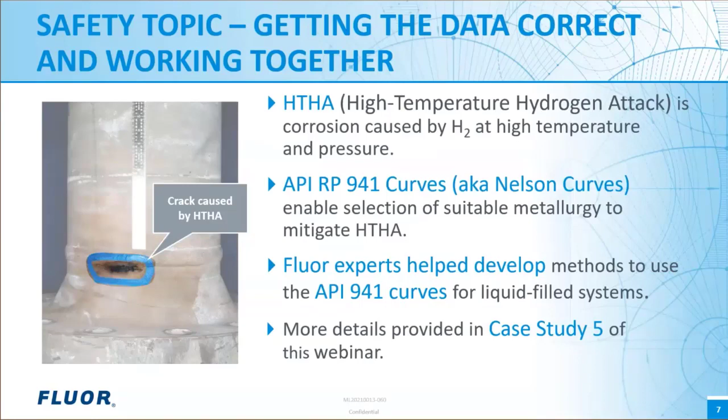Many processing plants rely on simulation models to provide the thermodynamic properties for design, and thus the use of the correct starting blocks is critical. The selection of a suitable thermodynamic property model to predict the vapor-liquid equilibrium for system components is important and can affect simulation results considerably. Without attention to detail, chemical engineers can find themselves relying on powerful process simulation programs without having the proper background knowledge in applied phase equilibrium thermodynamics. Sometimes a poor choice in the selection of a property model is made, or even sometimes no choice is made at all and the default is used.

Paul and I will talk about the benefits of special attention to property methods. Manipulation of these models in conjunction with other expert knowledge from the design team can improve safety and system design, and cut costs for the client.

We'll introduce what property methods are and why they're important, talk about different property methods and what they're used for, and remind the community about the AIChE DIPPR database. We'll also talk about Fluor's secured databases, developed to better reflect actual operating data, and look at case studies where our specialists have improved design in terms of product purity, safety, and operability.

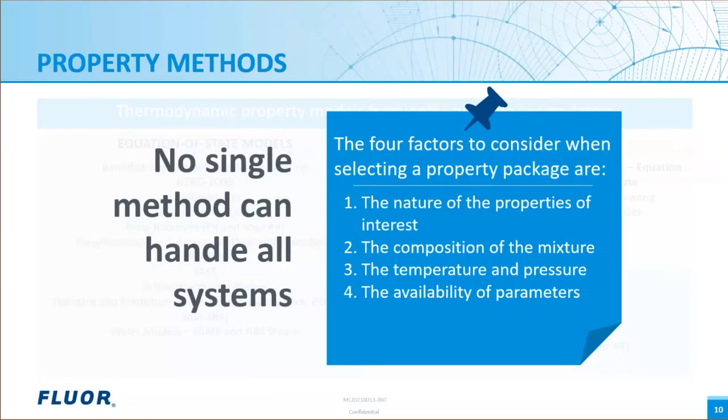Process simulators have a large number of methods available which are sufficient for most applications.

Thermodynamic properties are defined as characteristic features of a system capable of specifying the system's state. The items in the table frame the properties of a component, and those properties are not dependent on the physical quantity of the substance. Each property method has a different approach to thermodynamics, for example representation of the K value. Specific property methods have been developed to better model specific component mixtures.

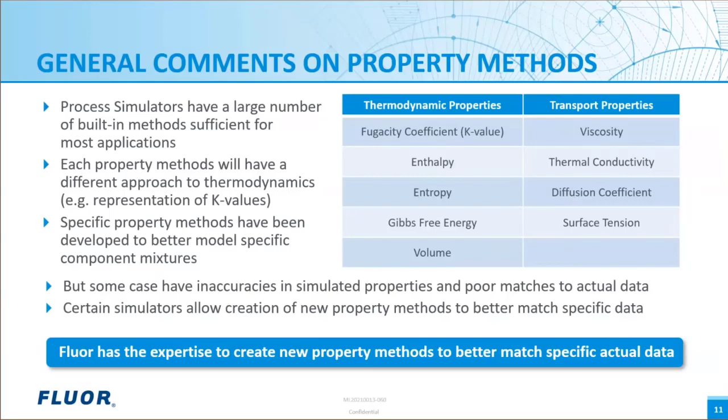All of this is very important. There are, however, regular inaccuracies in simulated properties, which sometimes have poor matches to actual data. What do we do then? We rely on other methods to approximate systems. We're going to concentrate on this today because Fluor has the expertise to create new property methods to better match specific actual data.

How does Fluor create new property methods to improve the match to actual data? One way is by modifying existing property methods. Using secured property databases helps us do this.

Secured property databases are a way of enabling improvement to existing simulators' property packages, based on operating data or literature data analysis. The data is available for specific or all members of the owner's organization for use in creating simulations. The database is not available to people outside the owner's organization, but making manipulations to the property methods in specific instances where there is a poor representation to actual data enables us to have improved process design.

Fluor has a number of secured property databases to improve commercial simulator models. They benefit clients by ensuring improved system modeling, ensuring that their plants are designed fit for purpose.

Fluor secure databases include the Fluor Solvent process, used for gas purification for the bulk removal of CO2; the Fluor EconoSolv process, based on dimethyl ethers of polyethylene glycol for selective removal of H2S and bulk removal of CO2; the C3 splitter for improved modeling of the separation of propane and propylene; Methanol, using a methanol-based solvent for removal of H2S and CO2; and Ammonia Water, where the properties of aqueous ammonia are very important to many process technologies.

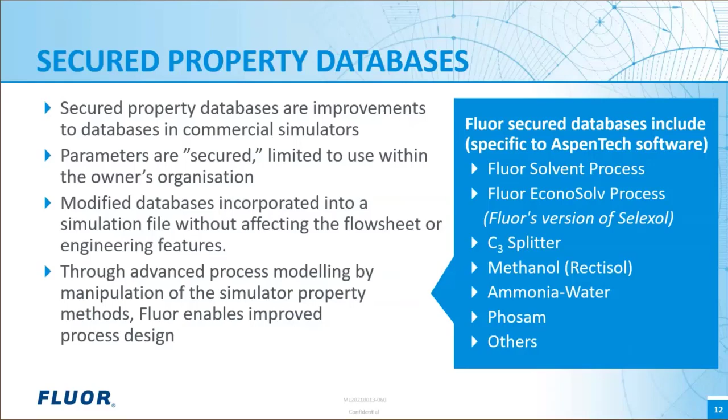Phosam, which uses phosphoric acid to separate ammonia from acid gases such as H2S and CO2, has enabled the development of a Fluor patent for removal of ammonia from Claus feed gas, and there are lots of other applications as well.

Another tool which chemical engineers at Fluor have available is from the American Institute of Chemical Engineers: DIPPR, the Design Institute for Physical Properties, a technical society of the AIChE. DIPPR's Project 801 database is recognized as the world's premier source of critically evaluated thermophysical properties.

It is an extensive database of rigorously evaluated pure component data. Due to the cross-spectrum industry review and the data research and analysis techniques, DIPPR is considered the gold standard.

It uses 34 constant properties and 15 temperature-dependent properties for compounds of interest. There are more than 2,300 compounds developed in the sponsor database.

People who use DIPPR are often companies involved in manipulating chemicals in new products and manufacturing processes, and the database is based on industrially important chemical compounds.

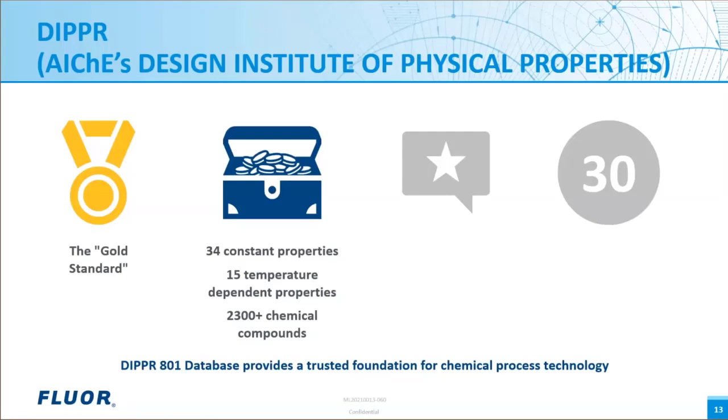Each year, members are invited to vote for the addition of new compounds or the review of existing compounds to ensure the database is kept current by incorporating feedback.

Correlations are developed by principal investigators and reviewed by industry experts. Fluor has been a member for more than 30 years, and Paul and others have chaired the membership committee during this period.

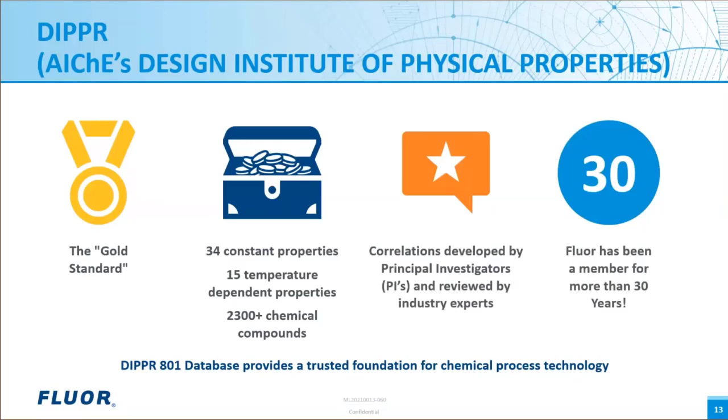The following are some quotes on how industry experts and our Fluor colleagues use DIPPR. With modern simulators, there's a tendency for blind automation, that is, not having the ability to see whether data and output are good or bad.

DIPPR provides background data for checks and verification. It also provides additional data for some items which simulators rarely provide, such as auto-ignition temperatures and flashpoints. It's useful for streams where it's not possible to create an entire simulation, but details are needed for relief calculations.

For instance, triglycerides and fatty acids, which are important in the process industry with the increasing prevalence of biofuels. That's as much as we need to say—it's an important tool which Fluor has been working with for many years.

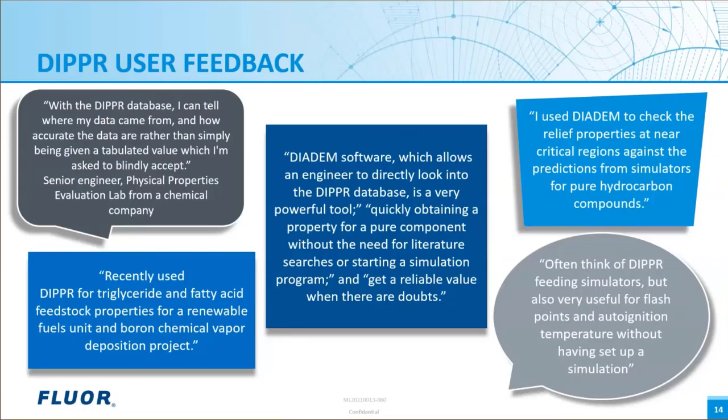We're now going to talk through a selection of case studies which show how, by our deep understanding of chemical thermodynamics, our chemical engineers work with other company experts to provide safe and operable designs.

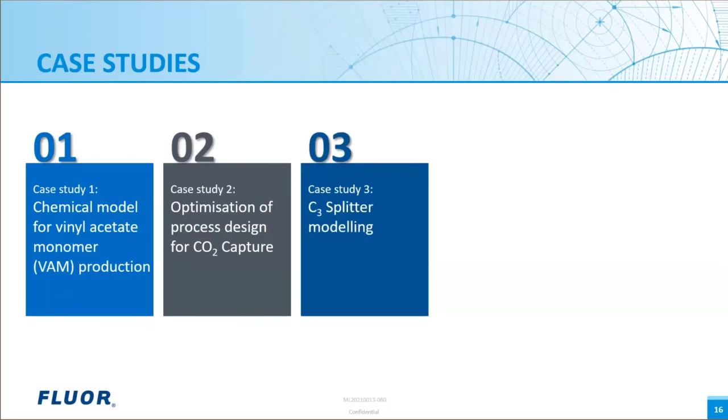We have 5 case studies which will address, firstly, modification to property methods to create a chemical model for vinyl acetate monomer production. Secondly, some of the ways we have improved our CO2 capture modelling. Thirdly, C3 splitter modelling in conjunction with our distillation expert Henry Kister.

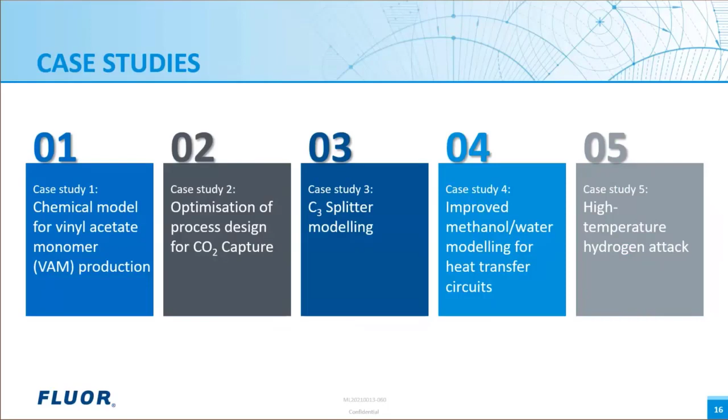Fourth, the care required in reviewing thermodynamic data and transport properties using methanol-water heat transfer fluid modelling as an example. And more detail on high temperature hydrogen attack, as touched on in the safety moment, where company senior fellows Paul Mathias, Gary Jacobs and Cathy Shargay provided their expertise.

Case study 1 is regarding the chemical model for vinyl acetate monomer production. We were provided with a heat and material balance from a licensed technology. Fluor needed to develop a simulation to reflect this. While preparing the simulation, it became apparent that the property method did not reflect the licensed technology or operating data.

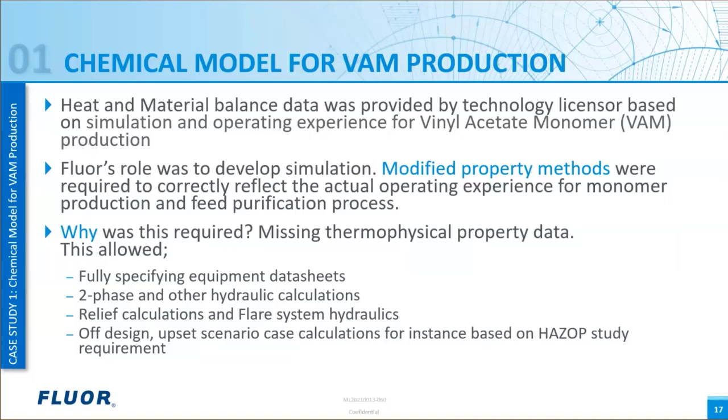Fluor needed to better model the data and provide missing thermophysical property data. This allowed fully specifying equipment data sheets, two-phase and other hydraulic calculations, relief calculations and flare system hydraulics, and off-design upset scenario calculations, for instance based on HAZOP study requirements.

So what did Fluor need to do? Thermophysical properties were required to simulate the VAM monomer production reaction. Areas which required particular attention were high pressure vapor phase reaction, CO2 removal, product purification and byproduct removal, and heavy ends removal.

After review of the data and the literature, 2 property models were modified for better representation of the data. These were molecular, which was used for most of the process, and electrolytic systems.

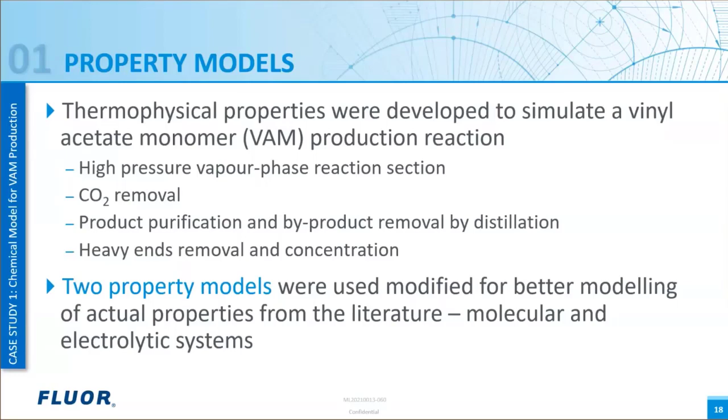This is a summary of the ASPEN Plus model modifications which were carried out. VLLE data was regressed using the ASPEN Plus data regression system, using various reliable data sources.

For the first item on the table, about the adapted property methods: this used standard NRTL to describe the non-ideality in the liquid phase, with Redlich-Kwong in the vapor phase. In this instance, the Redlich-Kwong method was modified to treat the acetic acid as a dimerizing component.

Dimerization is two molecules of similar chemical composition coming together to form a single compound known as a dimer. In this instance, due to the carboxylic group and the position of the hydrogen bonds, gaseous acetic acid can form cyclic dimers with strong hydrogen bonds. This needs to be taken into account in design, but is not otherwise modelled by simulation packages.

The second property method on the table is a subset of the first using the Margules perturbation method and could be used for sensitivity checks. The third is the electrolytic NRTL in the liquid phase, which was applied to CO2 removal, again with variations of Redlich-Kwong in the vapor phase. This was to model hot carbonate for CO2 removal.

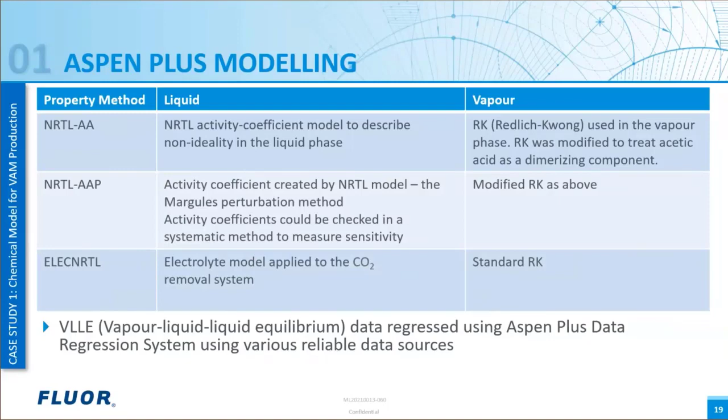The results of the simulations were compared to the literature for completeness. Here's an example of the phase behaviour for two ternary systems: vinyl acetate, acetic acid, and water. Points on the graph are actual data and the lines are calculated by the model. I think you'll agree that the calculated data matches the actual data pretty well.

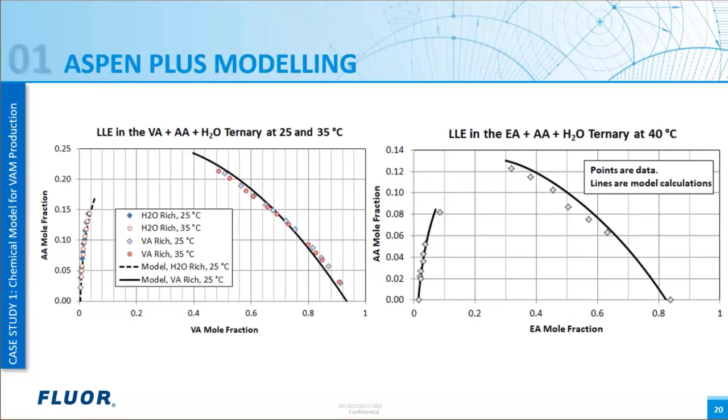So why was the property method manipulation so important? We described previously what the expected outcomes for design were, but in particular it should be noted that the data for the flash gas compressor from the licensor was only preliminary data. Design was firmed up using the property method to understand the extent of dissolved gas in the VAM streams, which in turn was integral to the machine package design.

Also, in the long term, the client wished to develop a training simulation, meaning a full plant simulation would be invaluable. Now going to hand over to Paul, who's going to talk about case study 2, which is the optimization of process design for CO2 capture.

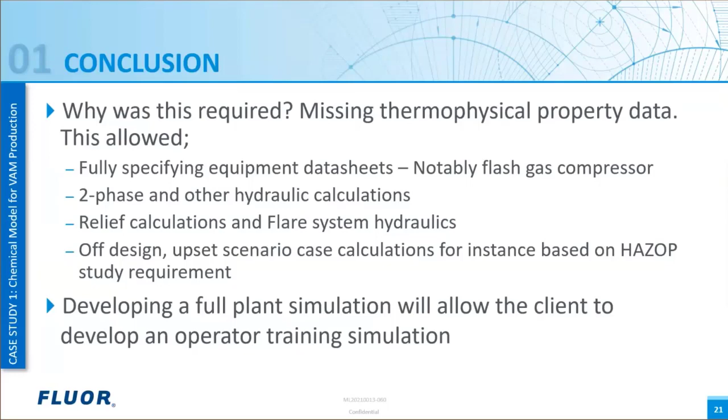Thanks very much, Samantha. I'll now, as Samantha said, move on to talk about CO2 capture technology. The transition to net zero will certainly not happen overnight, and sequestration and capture of CO2 are expected to provide a useful technology to mitigate climate change in the medium term.

Fluor has been developing and offering CO2 capture technology for more than two decades. Process modeling is particularly critical for CO2 capture processes due to the large energy requirements and capital costs. Just to give you an example, post-combustion CO2 capture could reduce the thermal efficiency of a power plant by something like 20%. By contrast, CO2 removal from natural gas, the reduction in thermal efficiency is an order of magnitude less, or about 2%.

Hence, accurate and reliable modeling is of vital importance to minimize TIC, or total installed costs, and also operating costs.

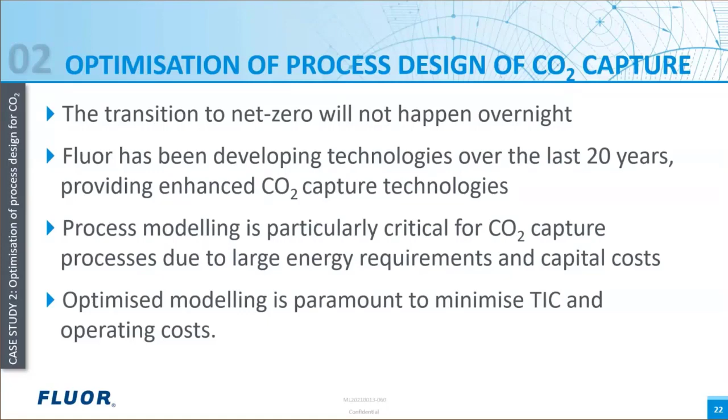Samantha mentioned the value of secured property databases for process technology. Fluor has developed these databases for its technology known as Econamine FG+. This technology has been validated for several CO2 sources, including those from power plants, cement production, and SMR, or steam methane reforming. Significant effort has been devoted to ensuring a technological advantage for Fluor's technology, both within the company and also in collaboration with partners.

As an example of working with partners, Fluor is collaborating with PNNL, or Pacific Northwest National Lab in Richland, Washington, to develop a slate of water-lean solvents. It's another example of the advantage of bringing together a diversity of skills to facilitate technology development. Fluor, as you may know, has expertise in process modeling, process design, plant construction, and operation and cost estimation, while PNNL's expertise includes areas like molecular modeling, compound synthesis, a variety of sophisticated analytical techniques, and generally chemical R&D.

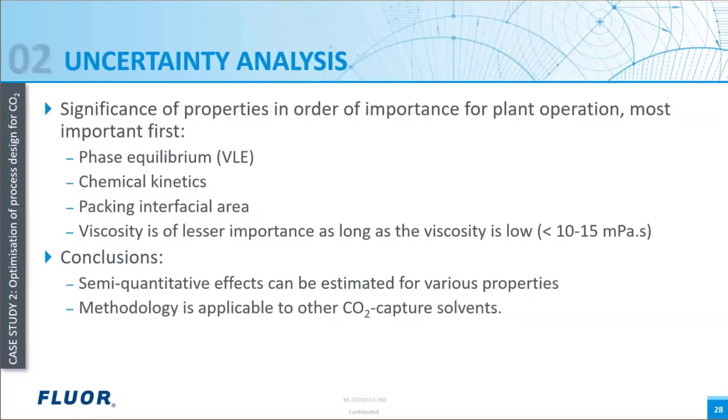Thank you very much, Paul. Case study 3 concerns improved modelling of C3 splitters. C3 splitters separate propane and propylene by distillation. The separation is very difficult to simulate accurately, as the propylene-propane relative volatility is close to 1, typically 1.05 or 1.1.

Small errors in the relative volatility cause large uncertainties in column design, for example, for the reflux ratio and reboiler duty.

A property database of the best available data was developed by Fluor in collaboration with the recognized industry distillation expert and Fluor Senior Fellow, Henry Kister. Paul will be blushing at the moment, but as Fluor Senior Fellow, his and Henry's exceptional level of expertise were used for the creation and validation of this database and property model.

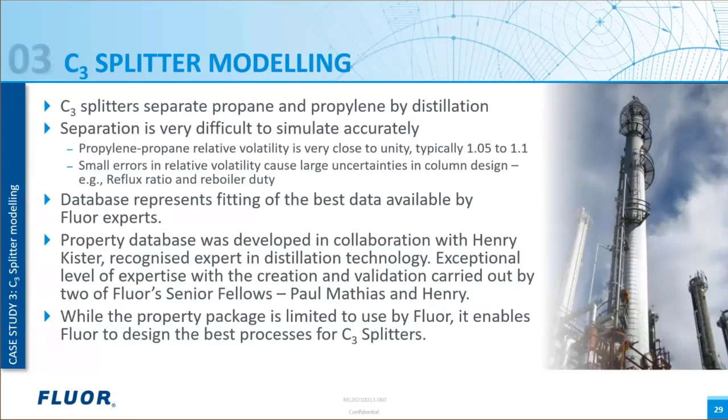This is one of the secured property databases I mentioned earlier, which you will remember is limited to use by Fluor, and it enables the best design for C3 splitting processes.

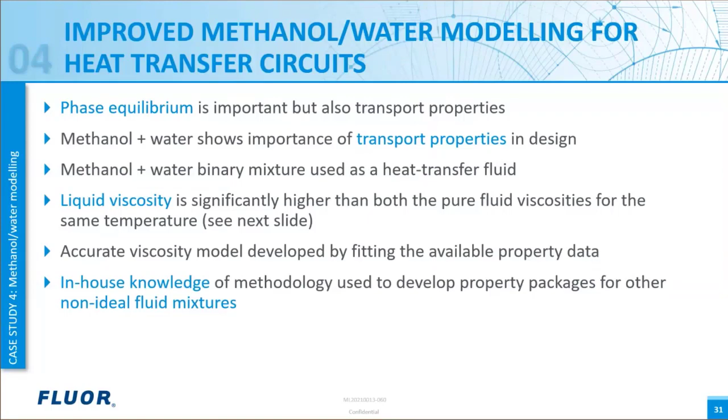Methanol plus water is a binary mixture used in heat transfer fluids. The liquid viscosity of the mixture can be significantly higher than that of the pure fluid viscosities depending on operating conditions. In this instance, an accurate fluid viscosity model was developed by fitting the available property data. This in-house knowledge can be applied to develop property methods for other non-ideal fluid mixtures.

I doubt any commercial simulator would give you the degree of accuracy that this independent modelling has provided. As I said previously, this is an example of the benefits of being able to model a system correctly when there are unexpected values for transport properties. The method employed can be used for other examples.

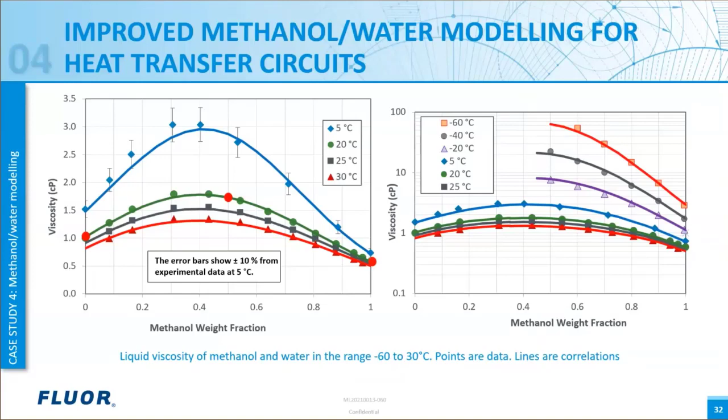Thanks very much, Samantha. As I stated in the safety topic, HTHA, or high temperature hydrogen attack, is a dangerous condition that can occur in process equipment constructed of steel and exposed to hydrogen at elevated temperatures and high hydrogen partial pressures. The API curves provide an authoritative guide for safe material choice to mitigate the occurrence of HTHA by relating material selection to temperature and hydrogen partial pressures.

These curves use the result of experimental tests and actual data acquired from operating plants to continuously update practical operating limits for carbon and alloy steels in hydrogen service.

As I mentioned earlier, HTHA can and does occur in liquid filled systems, and hence the use of the API curves requires estimation of the hydrogen partial pressure as a function of temperature, pressure, and liquid composition. However, there is less experience in applying the API 941 curves to liquid filled systems.

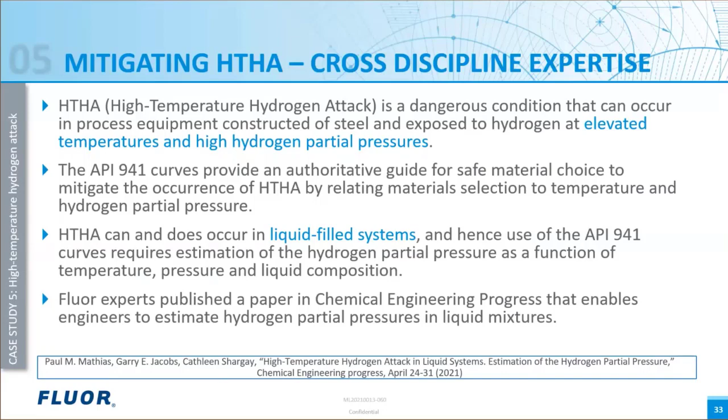My colleagues Garry Jacobs, Cathleen Shargay, and I published a paper this year in Chemical Engineering Progress that helps materials science and process engineers estimate hydrogen partial pressure in liquid mixtures so that the API 941 curves can be applied. We will next provide the takeaway messages and results from this paper, but we urge the readers to actually read the paper for the details.

I should inform you that material experts typically apply a safety margin of 50 degrees F or 28 Celsius to account for uncertainties, for example in temperature or hydrogen partial pressure. As an example, I'm going to show you some specific results for the steel grade required at a hydrogen partial pressure of 500 psi or 3.4 megapascals.

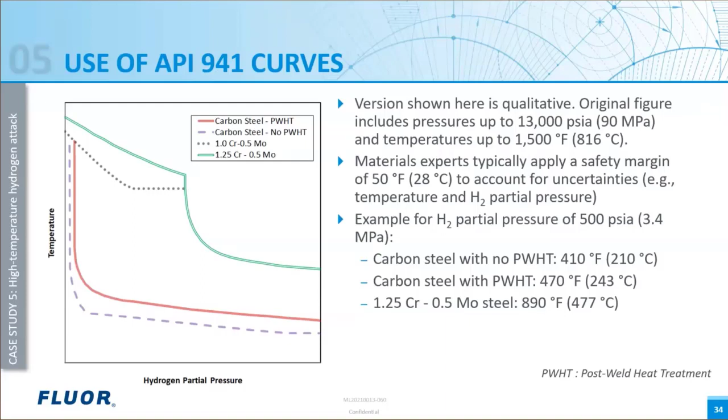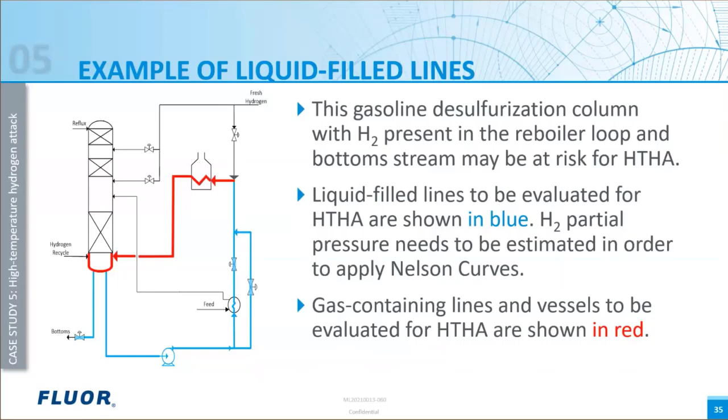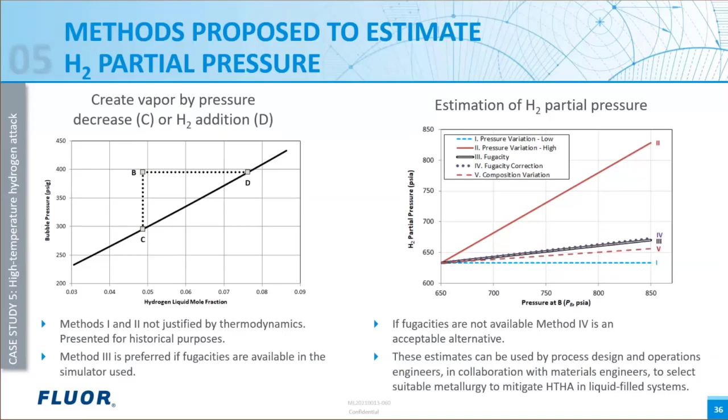This concludes the presentation of our case studies, and I will now move forward to a summary of our webinar. So let's move forward to the summary.

So how does Fluor actually acquire useful operating data? As Samantha mentioned in case study 1, vinyl acetate monomer, we checked the model against the design provided by the vendor. In some cases, we modified the model. In other cases, we challenged the design. This is an iterative process since we constantly go back to the data and our experience.

In case study 2, which is CO2 capture, we demonstrated the use of lab and pilot plant data to improve our models. And in case study 3, which is Fluor's C3 splitter model, I worked with distillation expert Henry Kister to use data from operating columns to help fine-tune the property models.

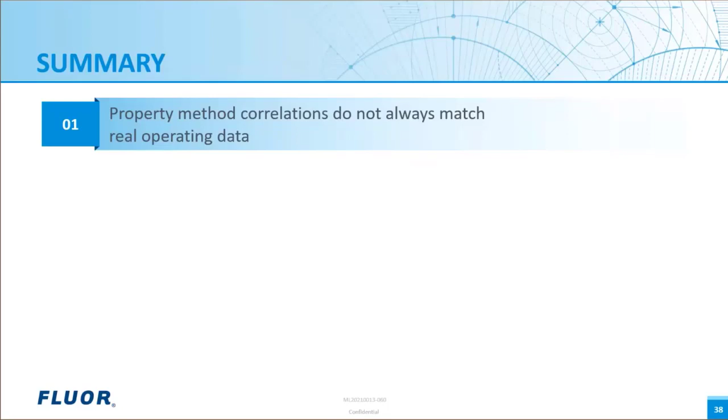Let's move on next to talk about this whole question of intuition and understanding. Having a human analyze, question, and interpret results is absolutely critical. Experienced process engineers can tell when the results in the model don't seem quite right or quite normal. The discussion on DIPPR shared this observation of an expert who said, with the DIPPR database, I can tell where my data is coming from and how accurate the data are, rather than being simply given tabulated numbers which I'm asked to blindly accept.

With the increase in automation, it's doubly important that engineers obtain a good feel for properties. Case study 4, the viscosity of methanol water, presented by Samantha, really highlighted the importance of recognizing that some properties may be different, may be unexpected, but they're also correct because they come from empirical data which has been validated.

We also need to improve our intuition. The discussions on property uncertainty analysis highlighted its use in developing design margins, but also its use in developing a feel for the effects of various uncertainties, as Samantha pointed out when we talked about uncertainties for the C3 splitter.

We at Fluor work very hard to make the best property models available to our engineers. In case study 1, we made sure the property model modeled the vapor phase dimerization of acetic acid. And the discussion on secure property databases highlighted the value of providing our engineers with the best and most current property methods. Of course, this is an ongoing effort.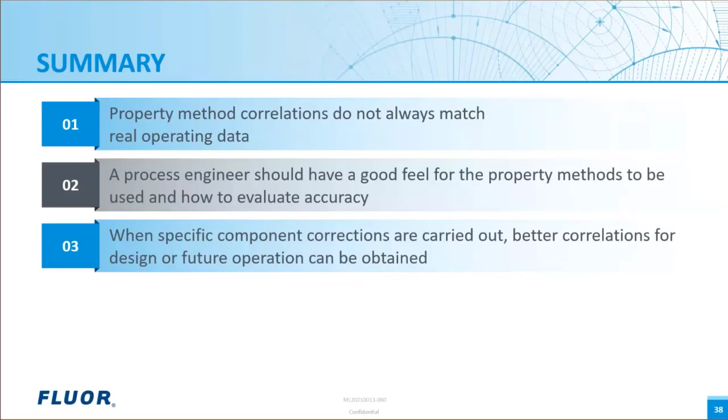Finally, in conclusion, I want to tell you that Fluor has strong expertise in applied thermodynamics and indeed other process technologies, and this ultimately ensures safe and operable designs. Thank you very much for your attention. We now look forward to receiving your comments and your questions. Thank you again.

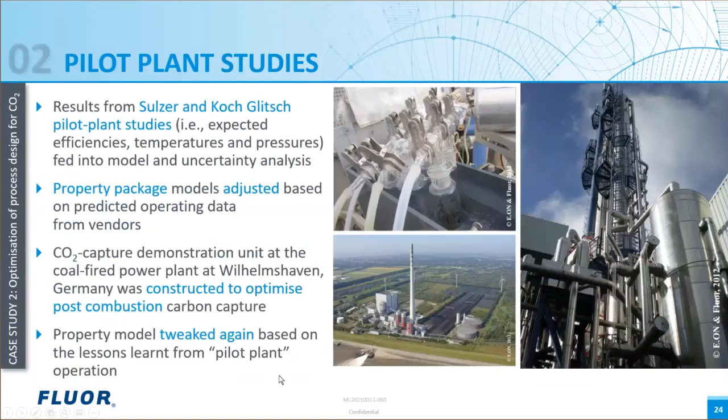Some of our technology hasn't really been described completely because it's proprietary. But I would refer you to the work that we did in collaboration with PNNL and other groups such as RTI on the EEMPA solvent, because that has actually been published extensively and in fact has been tested extensively. As I mentioned, there are lab tests that have been done. There was work done at PNNL labs. There's also work done at RTI in North Carolina. And as I mentioned, this solvent will soon be tested. This is an ongoing effort at the National Carbon Capture Center in Wilsonville, Alabama.

So I believe it's absolutely necessary to use a rate-based model for chemical absorption. And I think that I would not get any disagreement from experts in the field.

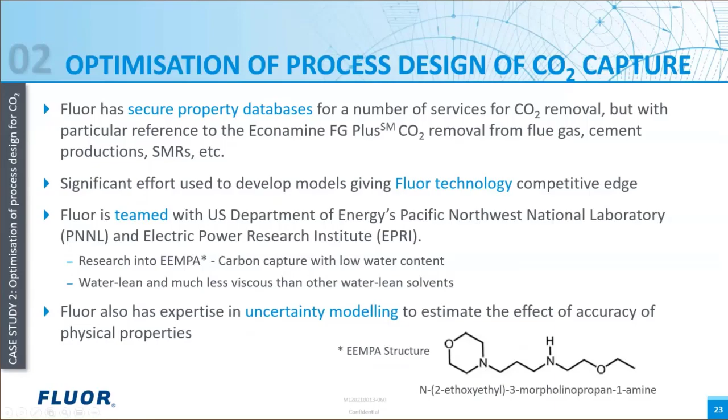And just as an extension to that question, where does diffusivity fall in the order of important properties as shown on slide 27? Well, it's somewhere in there. I think it's less important because we typically get a very high enhancement from the chemical kinetics, and oftentimes it's sort of mixed up in there, which is why I think even after we put in the best physics that we can, we've got to recognize that some of these models don't capture everything, and that's why we do pilot plant studies to sort of do the final fine-tuning.

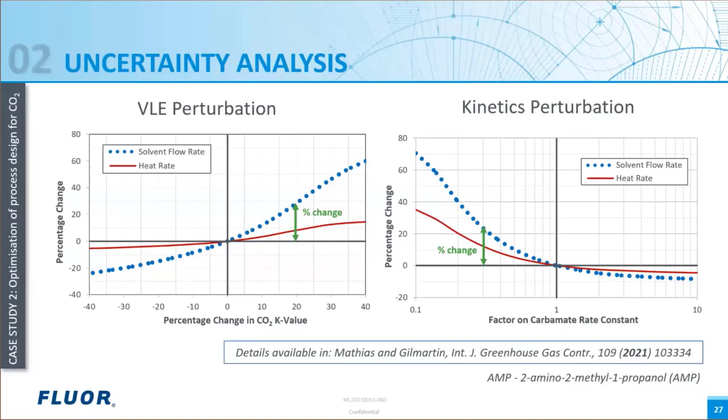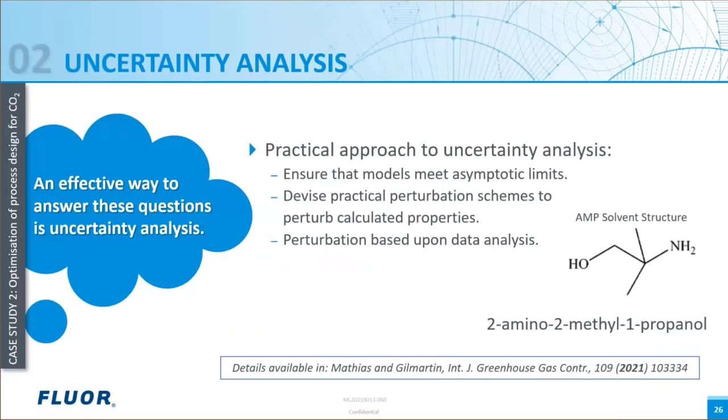I sort of mentioned this, but in a lot of these models there's something called the interfacial area factor that we may adjust, and these are adjusted based upon either lab data or pilot plant data. I wish our models were better. I think our models are pretty good and they're improving all the time, but we do have to put in empirical factors, and that's really why the experimental measurements are so critically important in order to validate the technology and make sure that we can actually scale up equipment.

I think we as a sort of a global community are getting better at this, and we certainly can get better, but ultimately it's some sort of a combination between good, practical, rigorous process modeling and the experimental data. There's constant complementarity, I think, between the two.

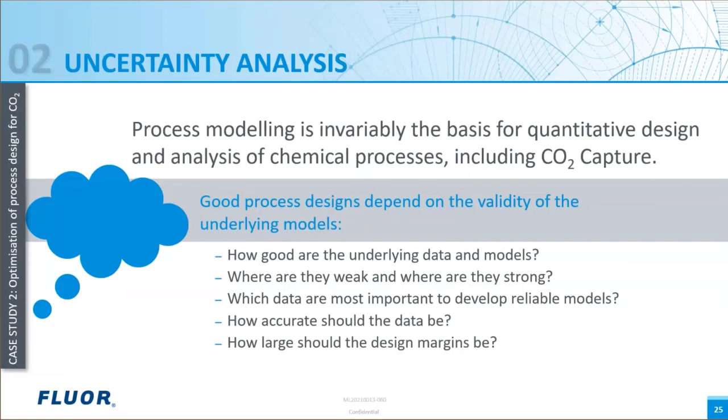All right, thank you for that. Next question is for Samantha. Do you think design margins, tray efficiencies will come down as we improve understanding of properties and uncertainties in simulations, or will owners want to stick with established norms?

Well, I could think of an example where on the C3 splitter, where we looked more deeply into the licensor design. It was an established licensor who'd done a lot of C3 splitter work before, but using the calculations and the methodology that we previously described, we came up with about a 5% difference between the reboiler duty that the database correlations gave and what the licensor gave. So we looked at uncertainty analysis, and I couldn't overcome this 5%. So speaking to the licensor, it became obvious it was a design margin. So in this instance, the uncertainty analysis allowed interrogation of the design margins and allowed the client to get the actual margin that they really wanted.

So we need to ensure that the client gets what they want, really. They may want some additional design margin. They may want to design the plant to exactly do what it says on the nameplate, but there's a discussion there with the client always. So sometimes, for instance, we can cut down design margins and save money.

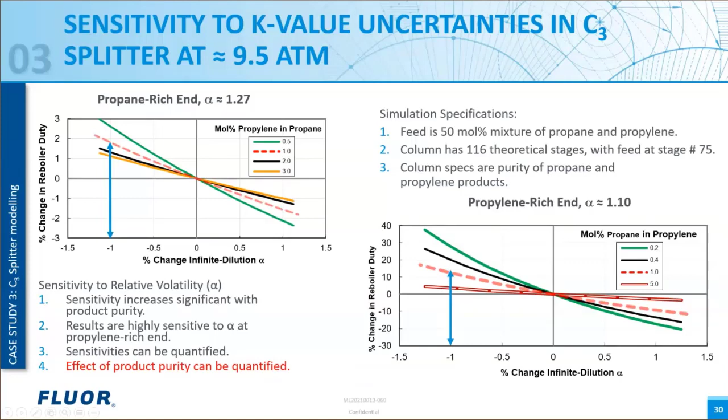Thank you, Samantha. The next question goes to Paul. For the methanol water mixture, is the cubic plus association CPA method a good alternative according to your experience?

Well, my experience with that method is mostly from the literature, and I know it to be a very good method. I've got to admit, I don't know how much that method has been applied to viscosities. I've seen a lot of application to phase equilibrium, vapor-liquid equilibrium, and liquid-liquid equilibrium, but I don't know whether it has been applied to viscosity. I'll have to look into it, and maybe we will research this subject and get back in the official Q&A answers we provide soon.

Okay, thank you. The next question also goes to you, Paul. Will machine learning eventually make equation of state, activity-based property models, etc., redundant?

I think that's an open question. If we read the popular press these days, there are such advancements made in machine learning and artificial intelligence that I don't think we should say no. But my own feeling, from all my years of experience, is that if we can identify and define a problem, in this case we have fairly good semi-empirical or phenomenological methods, and we know how to improve them based upon data. These models are thermodynamically consistent and do phase boundaries correctly, because those come from, for example, flash calculations or distillation calculations. Given all of that, I don't quite see it.